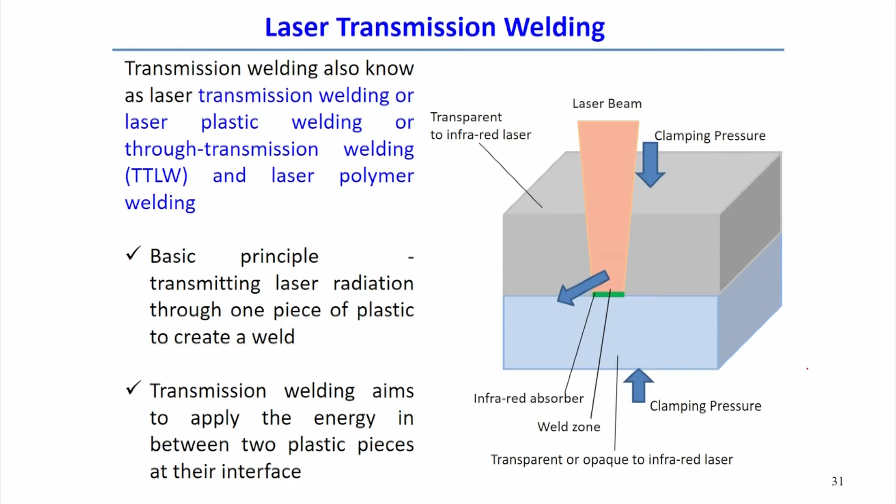Looking further, the process requirements for laser transmission welding: first is the transmitting upper part. The upper layer or component needs to be transparent to the laser wavelength.

The transparency of the laser light depends on the wavelength of the laser specifically used for the welding process. Normally, for example, 808 nanometer or 980 nanometer wavelengths are used, in the infrared or near infrared spectrum. In that range, the laser is specifically applicable for laser transmission welding.

Once we have the transmitting upper part, the next component is the absorbing lower layer. We choose the lower layer component such that it is able to absorb the laser light energy to generate heat at the interface.

Sometimes if both polymeric materials are transmissive in nature at the specific wavelength of the laser used, an absorbing additive such as carbon black doped at a rate of around 0.5% can be used at the interface layer. That carbon black absorbs the laser energy and creates some melt pool.

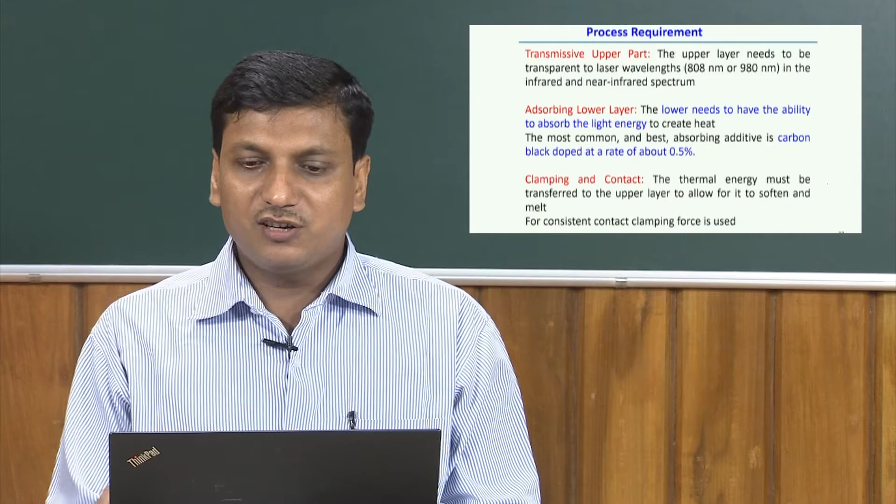Material compatibility: most plastics to be joined require similar chemical compatibility. The two components have to be chosen such that almost similar compatibility exists. At the same time, the melting and softening ranges for both plastics should be similar, or at least there should not be much difference in the melting point between the two components to be joined by laser transmission welding.

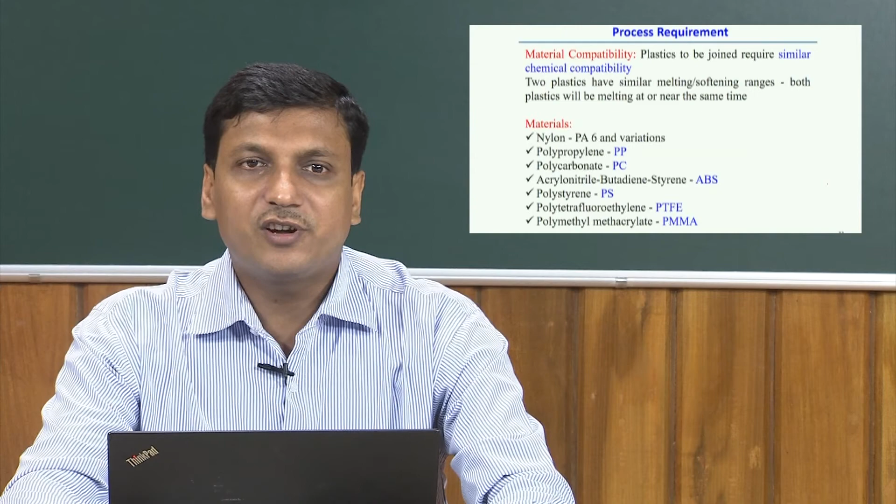Typical materials joined by this laser welding process include nylon (PA6) and its different variants, PP, PC, ABS, and polystyrene. These are short forms for different polymers that can be joined using laser transmission welding. PTFE and PMMA type materials can also be joined using laser transmission welding.

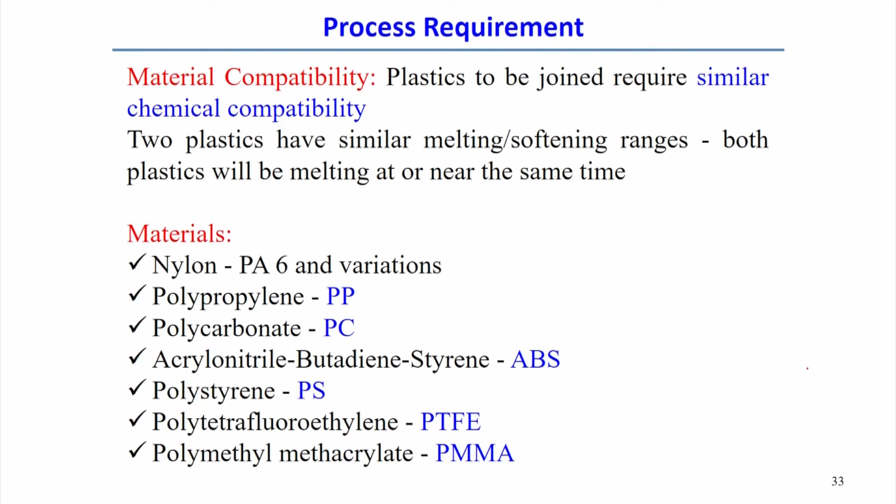Looking at the advantages with respect to other welding processes, there is minimal mechanical stress. The mechanical stress is very low because the difference in thermal expansion coefficients between the two materials is very small, so there is less chance of generating large amounts of mechanical stress.

Precise energy control: since we use laser as the source, we can very precisely focus on a specified spot, making it possible to control the amount of energy released at the interface. Very strong and durable welds can also be achieved by this process, and minimum flash and particulate development occurs, making it a very clean process.

The weld joint, or heat affected zone, can be confined to a very small area with this welding process. And finally, it is a very fast process, so very little welding time is required. These are the typical advantages of using laser transmission welding for polymeric materials.

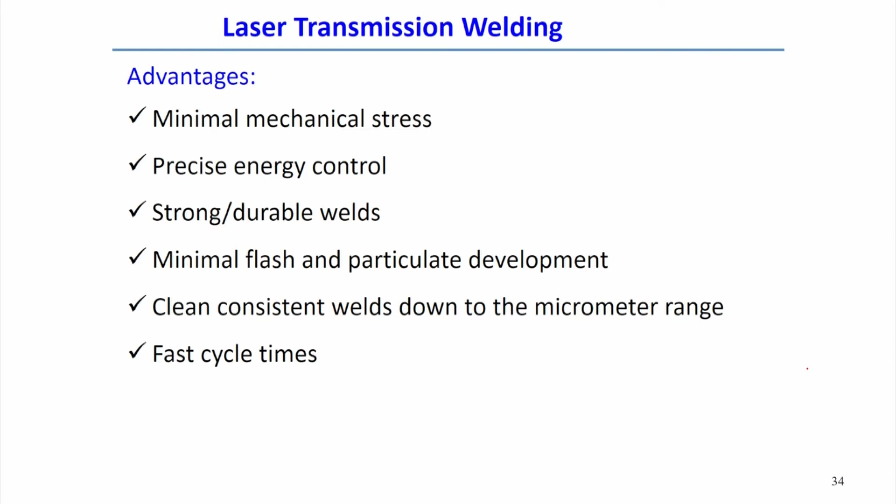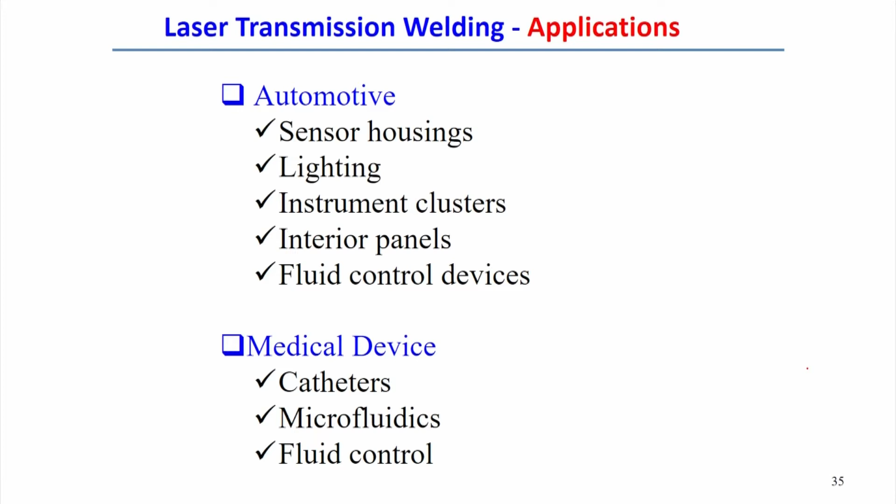Looking at other application areas of laser transmission welding: in automotive, sensor housing, lighting, instrument clusters, interior panels, and fluid control devices all use this process. In medical devices, there is huge application of laser transmission welding, specifically for joining polymeric materials, such as microfluidics and fluid control devices in medical instruments.

Overall, this process is mainly confined to joining polymeric materials, but other dissimilar combinations of materials can also be joined. We will discuss this later.

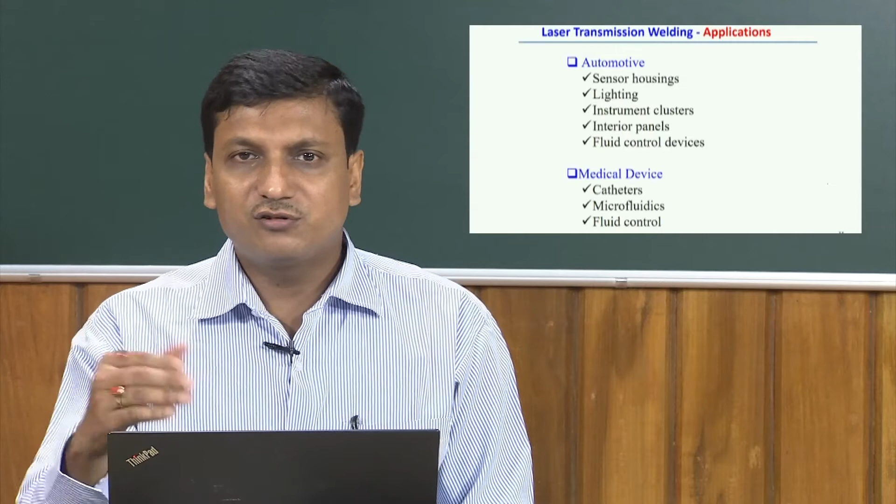Now, after laser transmission welding, we will look into glass welding. Glass is a very brittle material, so there are definitely issues in welding different kinds of glasses. Let us see what problems arise and what methodologies can be used for welding or joining glass.

Glass has a melting range called the glass transition temperature, a range of temperature over which heating of the solid material causes the glass to become softened and more flexible. After reaching this state, it is possible to join two glass components by simply applying small pressure at the contact point.

More precisely, when the glass crosses the glass transition temperature, it becomes a thick, viscous liquid, like slag. In this state it has very little surface tension, meaning the surface tension is reduced with the application of heat to the glass.

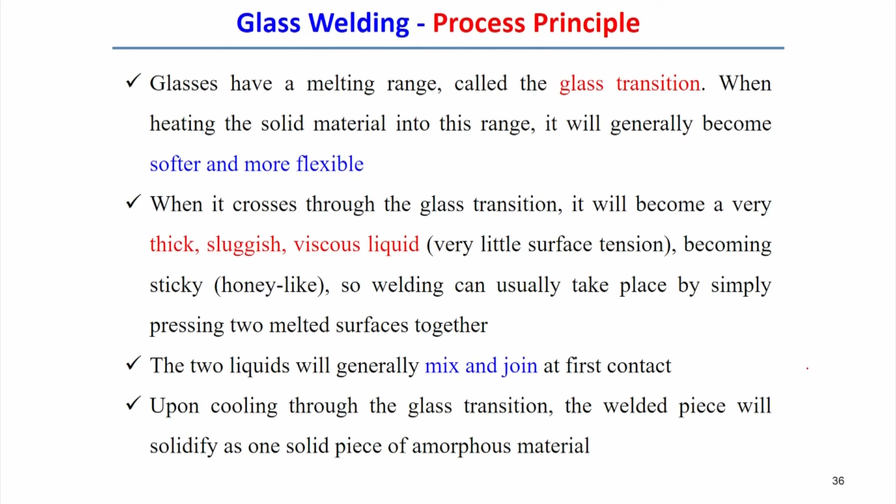Glass properties change through the glass transition temperature range, and after melting it takes the form of a viscous liquid. When they are in contact, the two components can readily join in the glass. After solidification, it again goes through the transition temperature, so properties can change as it's processed through this range, and one solid piece forms as an amorphous material.

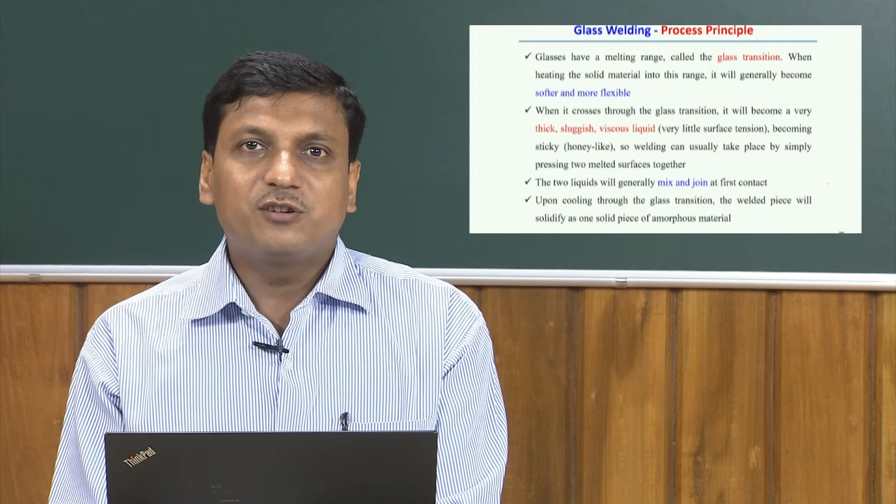We know that glass is a kind of amorphous material, not crystalline. Now, what methodology or type of heat source can be used for glass welding? Normally welding uses a gas or oxy-gas torch, or a furnace. These are typical heat sources for glass, and they can easily be applied locally to a certain part, causing melting and finally joining between the two components.

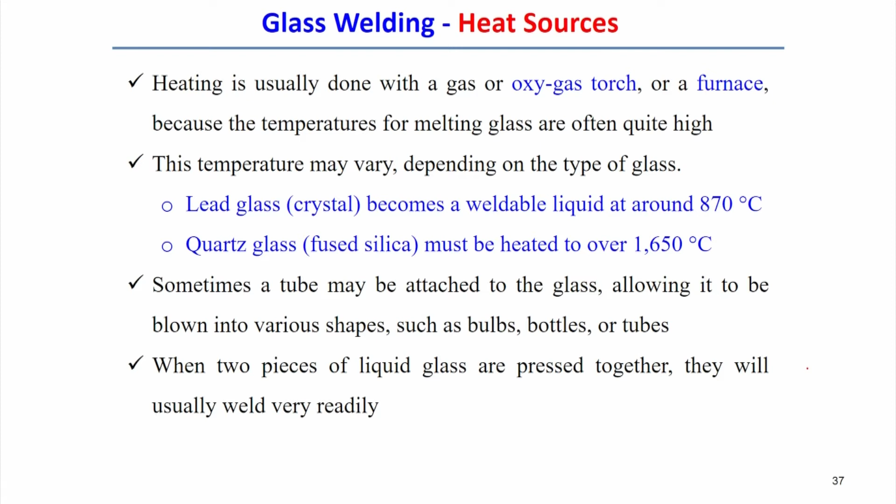But typically the melting temperature of glass is quite high, so the furnace is one choice for the heat source for welding glass materials. This melting range depends on the melting point of the weldable liquid, which differs for different types of glass. For example, lead glass, commonly known as crystal, becomes a weldable liquid around 870 degrees centigrade, but quartz glass, also known as fused silica, becomes weldable liquid around 1650 degrees centigrade.

So although both are glass materials, different types of glass may have a huge difference in melting point temperature, such that there is difficulty in joining two different grades of glass—this may be treated as joining two dissimilar materials, since there is a huge difference in the weldable liquid temperature between these two types of glass.

Sometimes tubes are attached to the glass, allowing it to be blown into various shapes. When the weldable liquid is formed in the glass, using a tube to blow it can create various shapes such as bulbs, bottles, and tubes. These are typical manufacturing technologies using glass.

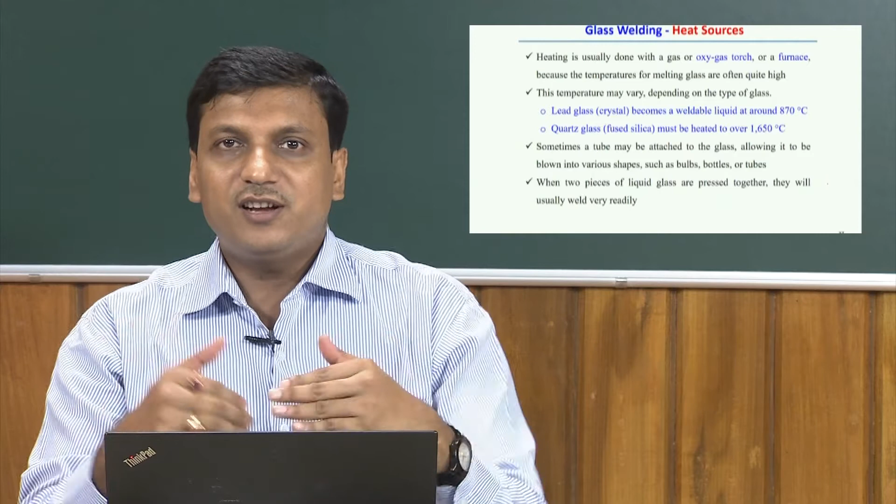But when two pieces of liquid glass are pressed together, they usually weld readily and join easily. However, although welding or joining technology for glass, or two different grades of glass, is well established, there are some limitations to the glass welding process. First, since glass is a very brittle material in its solid state, there is a high chance of cracking forming during the heating and cooling phases.

Because glass is very brittle, it is very difficult to absorb uneven thermal expansion during the heating or cooling phase. So there is a high chance of cracking forming during the processing of glass, specifically when you try to weld it.

For example, quartz has a very low thermal expansion coefficient, while soda lime glass has a very high thermal expansion coefficient. So joining these two types of glass is usually difficult. Therefore, it is very important to closely match their coefficients of thermal expansion to ensure cracking does not occur during the welding of glass components.

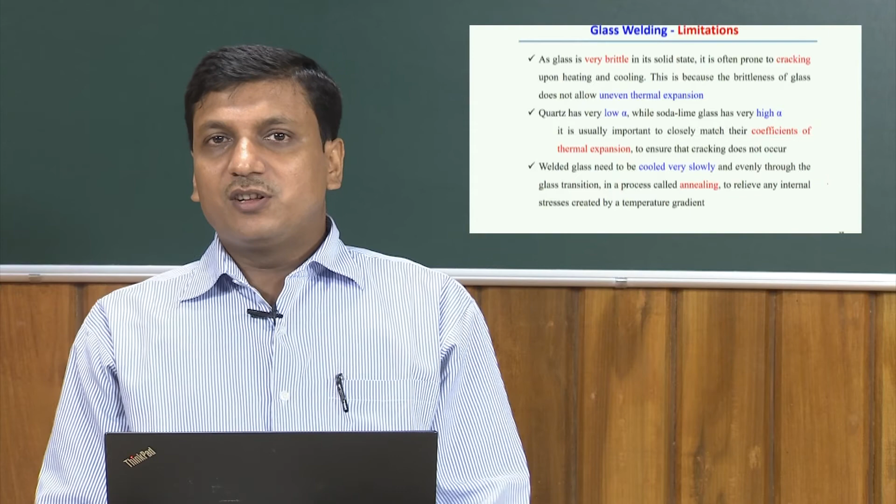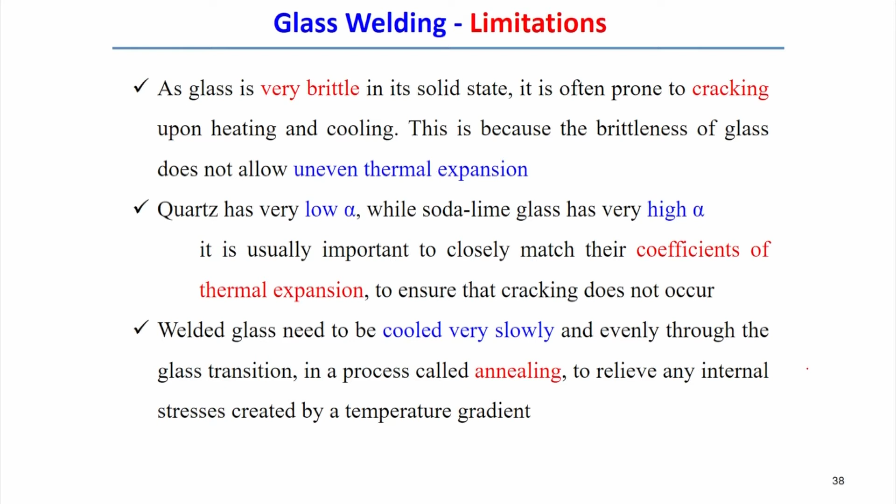This controlled cooling process is normally called annealing, which helps relieve internal stresses created by the temperature gradient. Therefore, the most significant limitation of glass welding is that very controlled cooling is required, and we must be very careful since glass is a brittle material that cannot even absorb a small amount of thermal expansion. That is the main limitation for welding glass components.

A typical application of glass welding is glass blowing. In this process, while the glass is in a liquid state, we use a tube to blow into it, which allows us to make different shapes such as circular, spherical, tubular, or cylindrical shapes. Different shapes can be formed, and this is generally followed during glass welding processing.

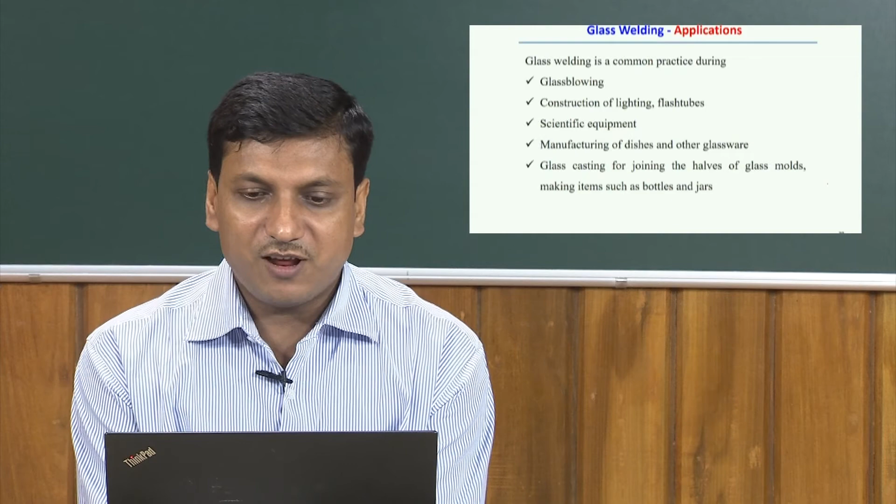Therefore, construction of lighting or flash tubes is another application of glass welding, along with scientific equipment and manufacturing of dishes and other glassware. Moreover, glass casting for joining the halves of glass molds, such as making bottles or jars, is also an application of glass welding.

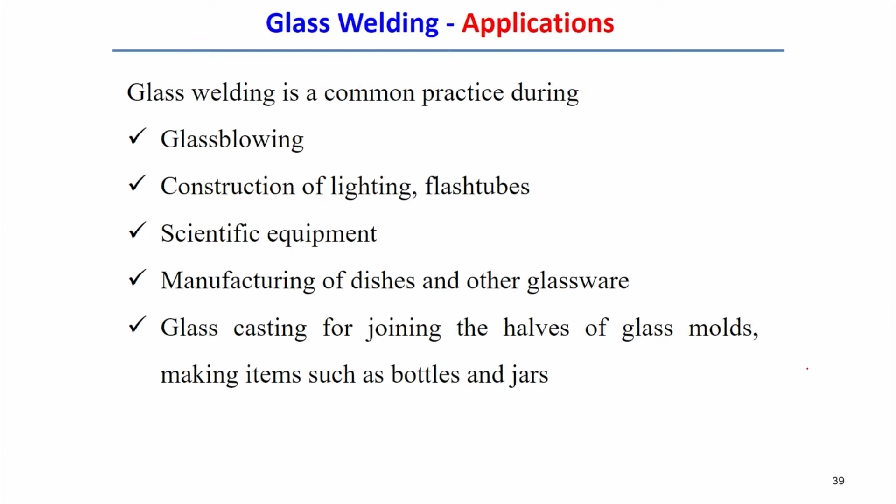Next, we will discuss the welding of ceramic materials. Ceramics are an important non-metal, and there have been several developments in different kinds of ceramic materials. Ceramics have high potential because of their increased toughness, high heat resistant capability, and non-catastrophic fracture behavior. These are the typical driving forces for the huge application of ceramic materials in several industries.

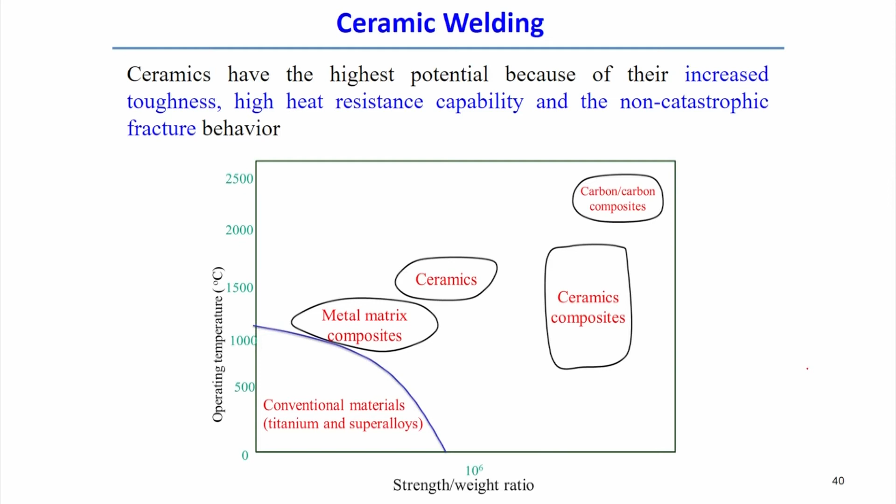Now, what are the typical joining or welding techniques for ceramic materials? Here you can see electron beam welding, laser beam welding, friction welding and diffusion welding - these are the main processing techniques for welding ceramics.

High beam energy application is basically restricted to small components of ceramics. For example, this can be used only for ceramics which have defined melting points, such as Al2O3. Therefore, for processing the welding or joining of Al2O3, we can use high beam energy, meaning electron beam energy or laser beam energy.

But in other cases, for example silicon carbide and silicon nitride, the use of high beam energy may not be suitable for this kind of material. High stresses caused by severe temperature gradients can easily damage the ceramic joint. Therefore, we should be very careful in the choice of material and the difference in their mechanical properties when joining ceramic components.

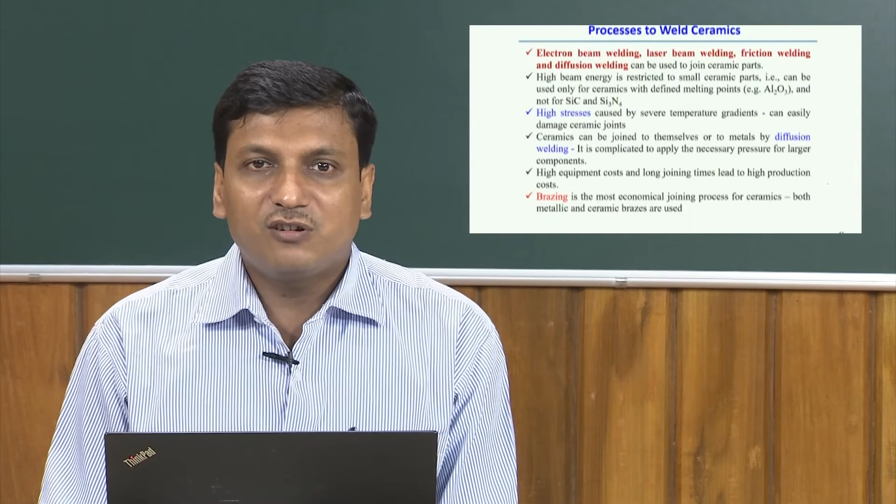Other significant joining methodologies for ceramic components include either similar joint configurations or dissimilar configurations with metallic materials by diffusion welding. In diffusion welding, the main difficulty is due to the necessary pressure that needs to be applied, specifically for larger components, and there is a time requirement. Normally the diffusion welding process takes a huge amount of time. High equipment costs and long processing or joining times basically lead to high production costs for ceramic components.

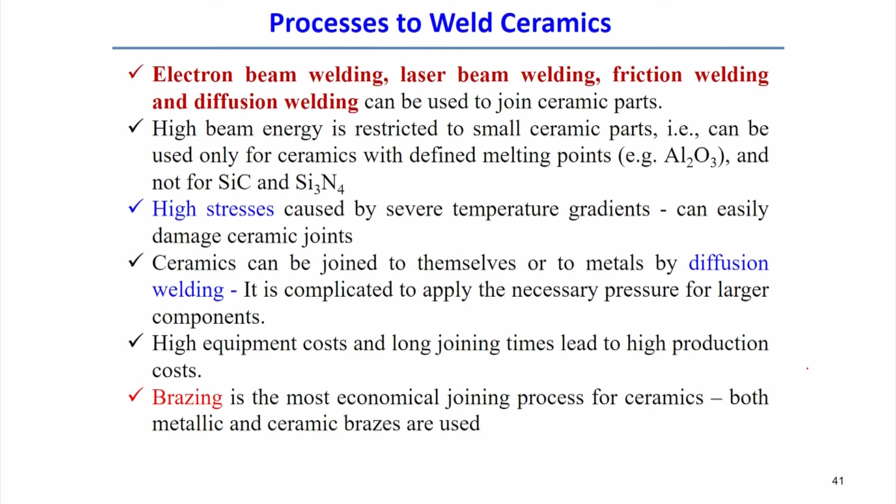Most economically for the welding of ceramic materials, people generally follow the brazing process, because brazing is the most economical joining process for ceramics. Both ceramic braze and metallic braze are used in this case.

If you look into the typical properties and applications of ceramics, they have very high temperature resistance, extremely high hardness, low electrical conductivity, high thermal insulating properties, high chemical resistance, and lower density compared to metal. These are the specific advantages of using ceramics.

Nowadays there is a huge application of ceramic materials, but the development or ease of weldability of ceramic materials is not up to the limit that we find in case of metallic materials.

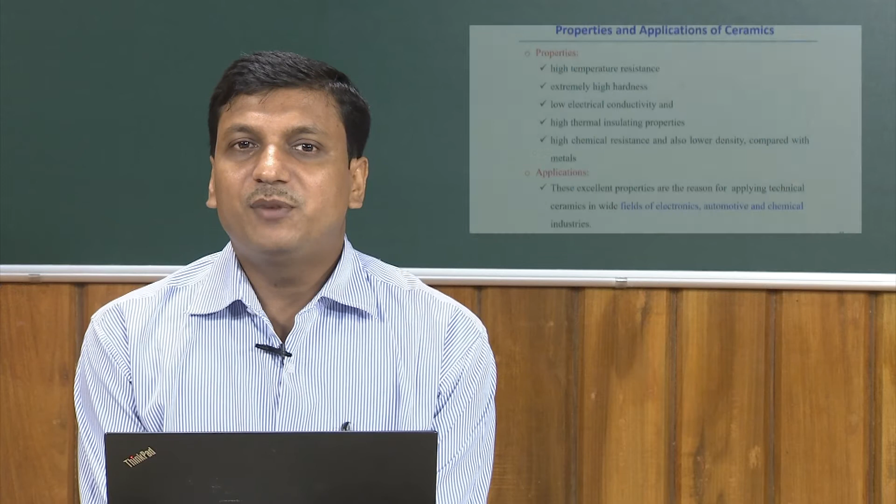Still, there is development in joining or welding of ceramic materials. As we discussed, we generally use high beam energy diffusion welding, and sometimes we use the brazing process for joining ceramic components, either ceramic to ceramic or ceramic to metals.

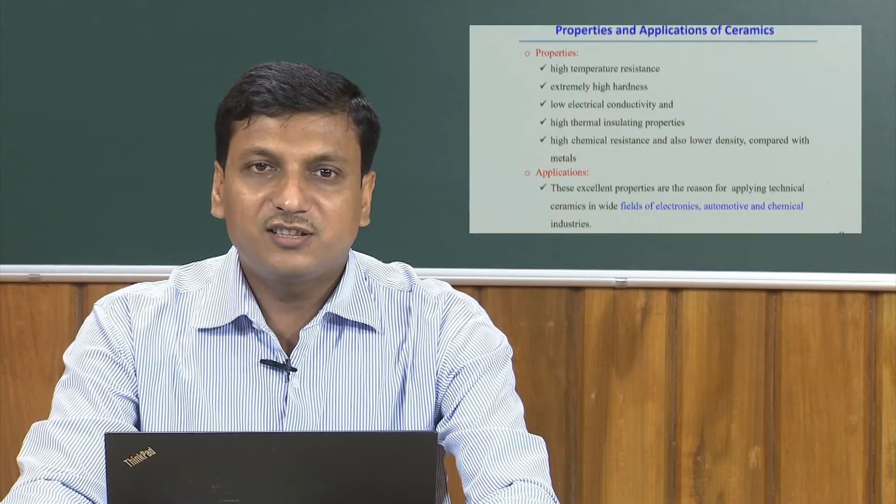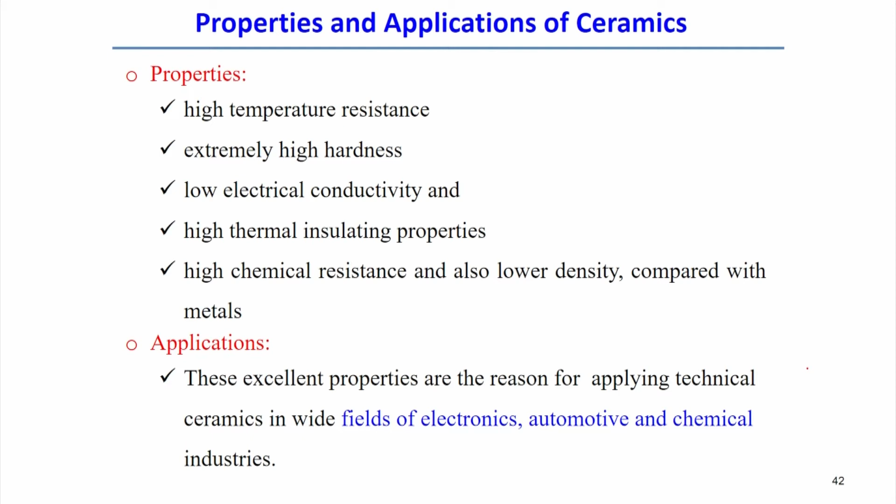There is a huge area of application for ceramics. Excellent properties are the main reason for applying technical ceramics in a wide range of fields: electronics, automotive, and chemical industries. These are the areas of typical application of ceramic materials.

In aerospace technology, some metal components can be replaced by ceramic components, because the aerospace industry goes through a very high temperature range, and high density metals may create problems. In that sense, ceramic is most alternatively used in that place, because ceramics have very good high heat resistance properties.

Ceramic welding is also applied during furnace operation, simply by conveying a dry mixture of refractory aggregate and oxidizable particles, kept together through specifically designed water-cooled lances.

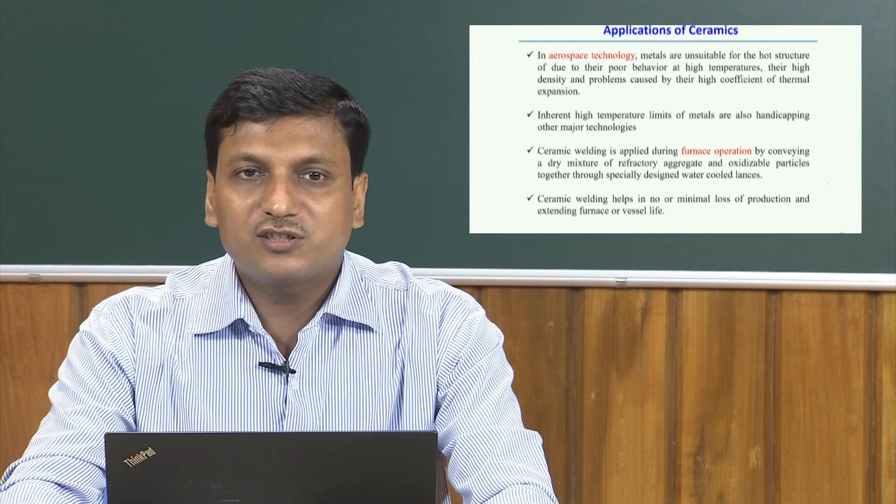In that channel we can put this ceramic refractory material, and then ceramic welding helps with minimal loss of production, while at the same time extending the furnace or vessel life.

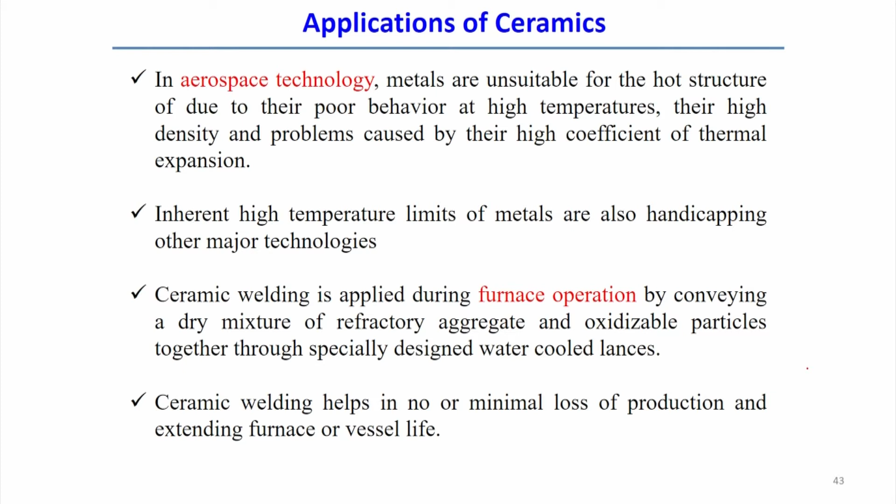During furnace operation, ceramic welding is an efficient way without loss of production, and at the same time it imparts to the life of the furnace or vessel.

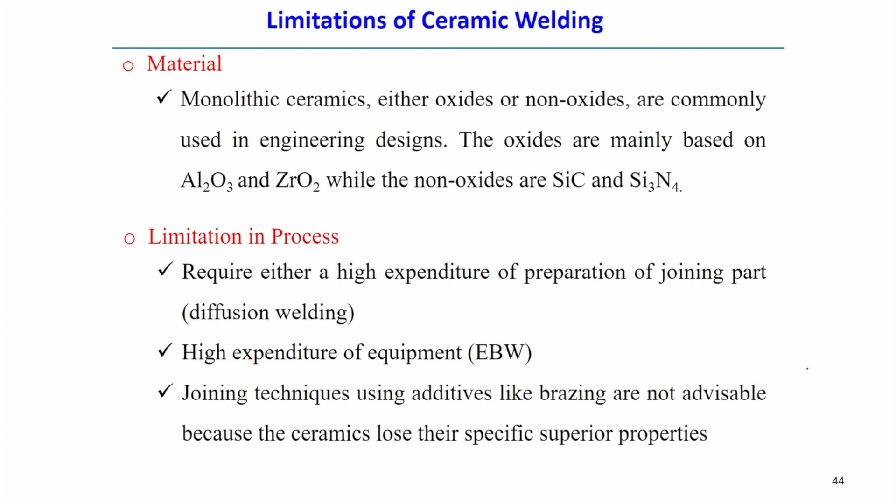Joining techniques like brazing are the most economical way for ceramic welding, but brazing is limited because the ceramics lose their specific superior properties. When you use brazing, the welded part between the two ceramic components becomes weaker compared to the base material.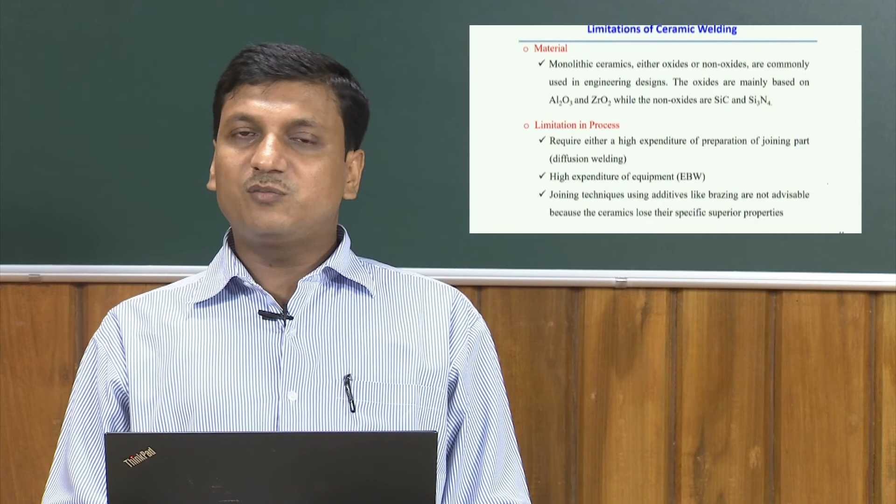Therefore, for very precise applications brazing may not be usable, but on the other hand, brazing remains the most economical way to join ceramic components.

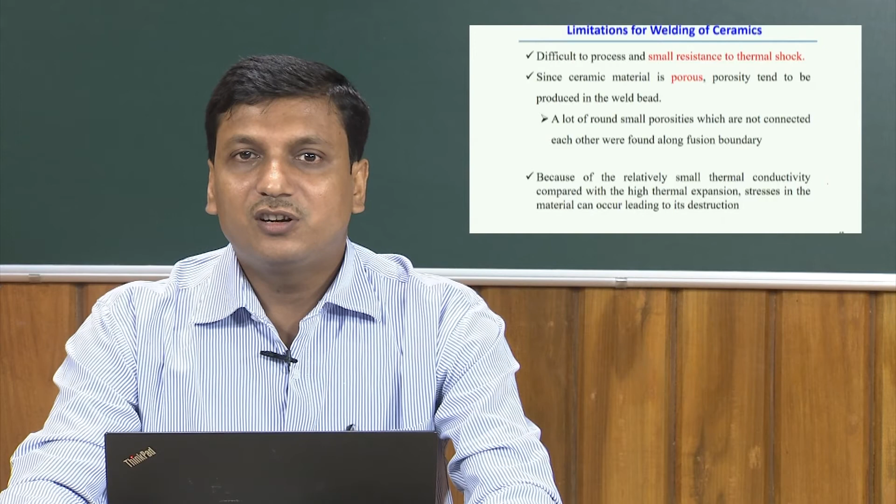Other limitations include difficulty to process and small resistance to thermal shock. It is very difficult to process ceramic materials because in most cases ceramic is also brittle in nature, with small resistance to thermal shock load, making it difficult to process.

Since ceramic material is porous, porosity sometimes creates problems during welding, and we can find marks of porosity, or find only porosities at the weld joint during fusion welding of ceramics.

Since ceramics have low thermal conductivity compared to other materials, high thermal expansion stresses can occur in the material, which can lead to its destruction.

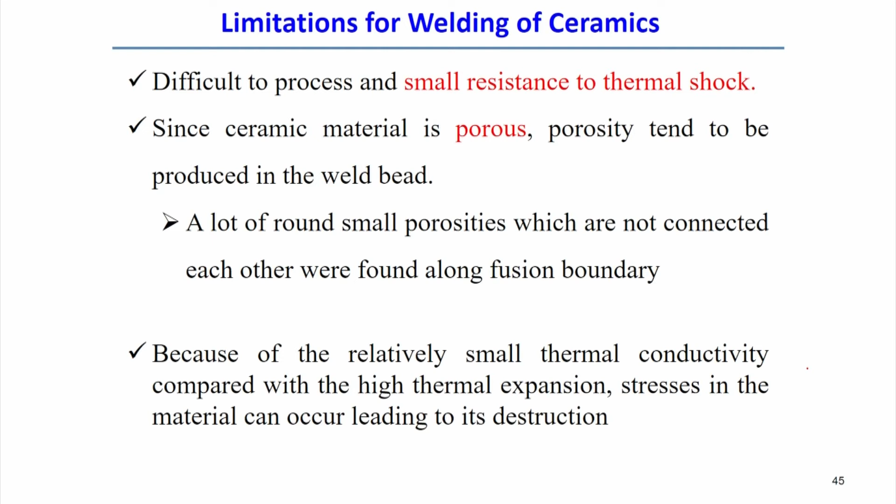So, low thermal conductivity combined with high thermal expansion can cause failure of the weld joint during the processing of ceramics. That is one obstacle or difficulty in processing ceramics.

Nowadays there is a huge application of plastic components, specifically biocompatible plastic components, in combination with metallic materials. We find this requirement specifically in the medical instrument or medical industry. Therefore, joining these two components, plastic to metal, has some significance.

But if we look into why there is a need for joining plastic to metal, although this is a dissimilar combination, there are several points: energy consumption, environmental concerns, high performance, and cost saving.

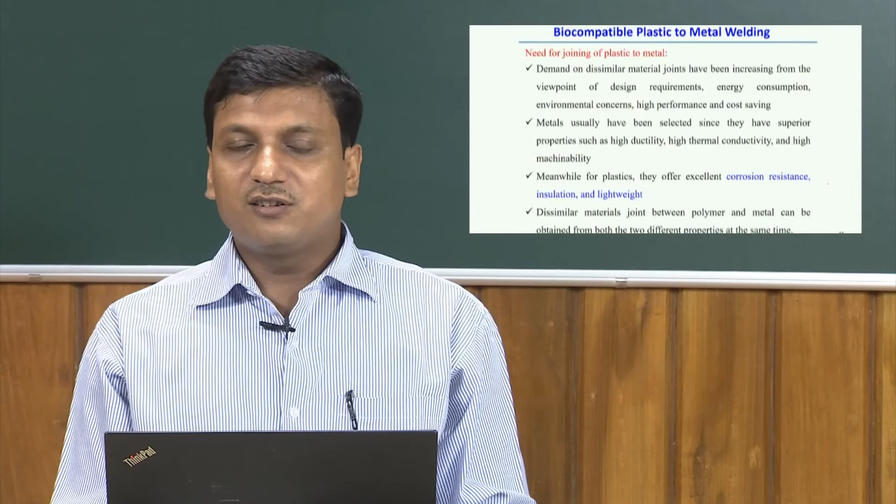Mainly metals have been selected since they have some specific superior properties, for example high thermal conductivity and high machinability. So metal has some advantage based on its properties, but plastic also has excellent properties like corrosion resistance, insulation, and lightweight, which are comparable to metallic materials. So metal has certain advantages, and plastic has certain properties too. Combining these two brings a huge difference in properties.

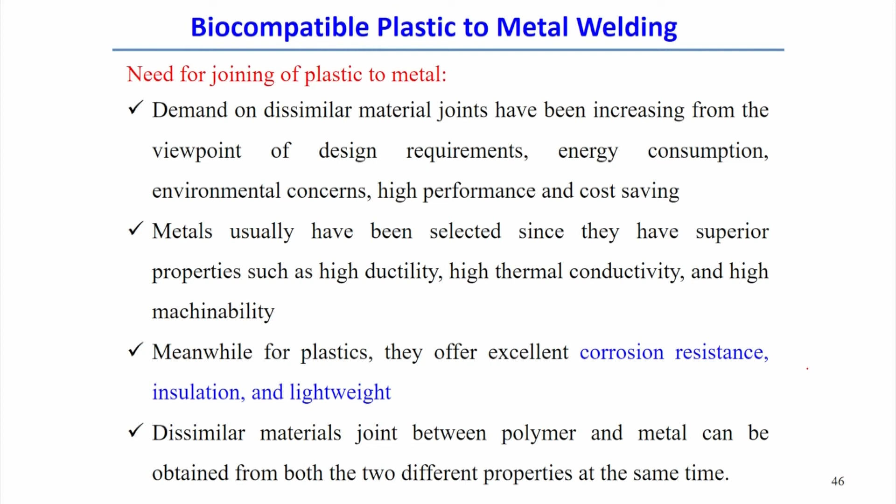Therefore, joining or welding metals to plastic has huge difficulties, because their properties are completely different—not only mechanical properties, but thermal and chemical behavior are also different. We can take an example.

If we see two materials, PET and stainless steel, and we want to join these—one plastic and one metal, stainless steel—we see there is a huge difference in melting point temperature: one is 243 to 260 degree centigrade, the other is around 1400 degree centigrade.

Thermal conductivity also has a huge difference, one is 0.24, the other is 138. For the coefficient of thermal expansion, one is 6 into 10 to the power minus 5, the other is 1.72.

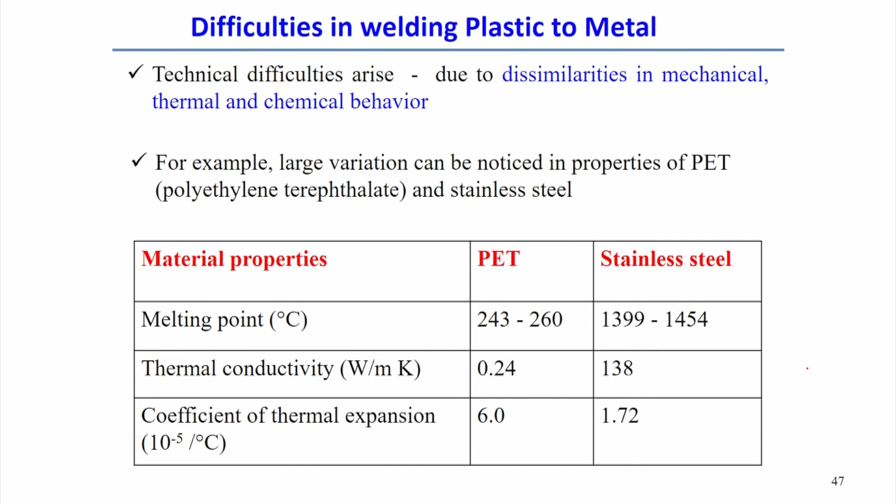So there is a huge difference in these mechanical properties, making it very difficult to join these two materials. But several methodologies have been developed for joining plastic to metal. One is polymer-metal hybrid joints formed using various joining techniques, such as adhesive bonds or glue, or mechanical tools—the most convenient way to join these two components.

Using adhesive bonding for joining aluminum and PTFE, we successfully achieved good results, but only after very good surface treatment with sodium. So surface preparation is an extra requirement in this case.

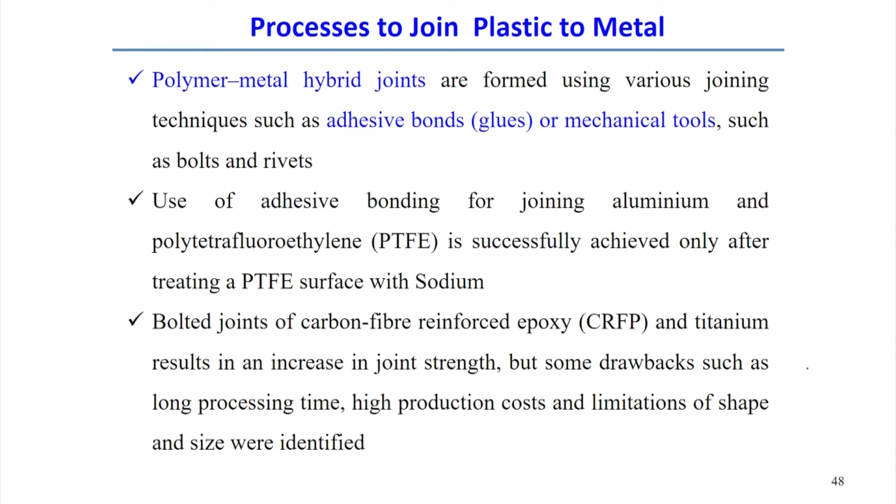Otherwise, bolted joints using mechanical instruments—simply bolted joints of carbon fiber reinforced epoxy (CFRP) and titanium—also result in increased joint strength, but they have drawbacks such as low processing rate, high production cost, and limitation of shape and size. That is the main obstacle in using mechanical joining of these two components.

The difficulty with adhesive bonds is that although we can use glue more easily for joining these two components, there are environmental restrictions on the emission of volatile organic compounds, and difficulties with mass production using adhesives or glues. Also, there is a limited lifespan for this glue, so in that sense it is limited.

Other ways to improve quality, production time, rate of production, and reliability of this dissimilar material combination include laser beam welding and resistance welding. These are the two main welding processes used for joining plastic to metal.

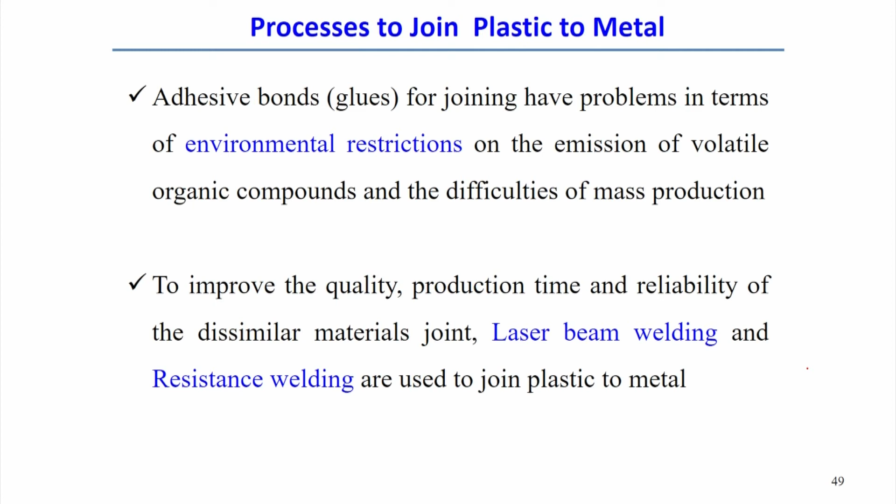If we look into the joining of TPC, that is the polymeric material and joining process such as mechanical fastening and adhesive, we can use it. But the point is if we use mechanical fastening, we can find stress concentration due to hole drilling, and there is extensive surface preparation also required, so that is actually incompatible for mass production requirements.

Alternatively, to avoid this situation, resistance welding can be used for joining metal to plastic. When applied to TPC, it produces a joint close to parent strength, because using the resistance welding process in short processing time, the joining strength is very close to the parent metal, or among the metal and polymer, whichever has lower strength. If you compare, an almost similar range of weld joint strength can be achieved by joining.

At the same time, additional advantages like reprocessability, recycling, online monitoring, automation and cost efficiency make resistance welding of metal to plastic combinations the better choice compared to using adhesives or mechanical joining.

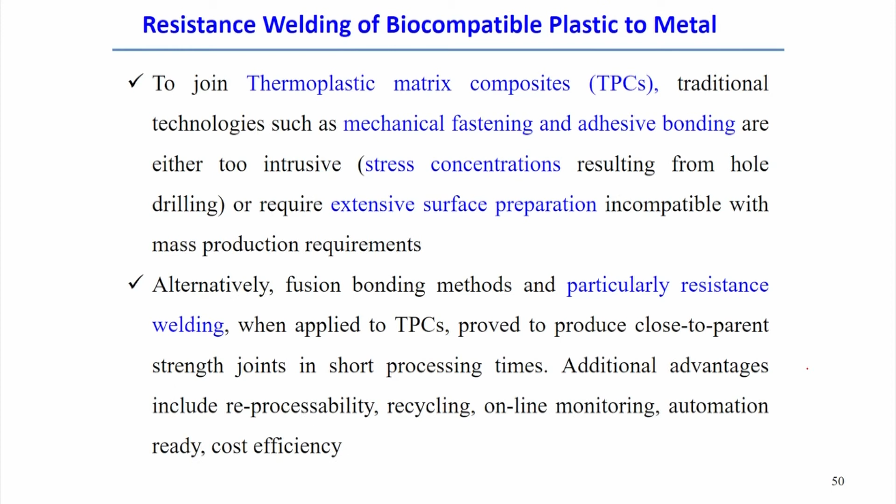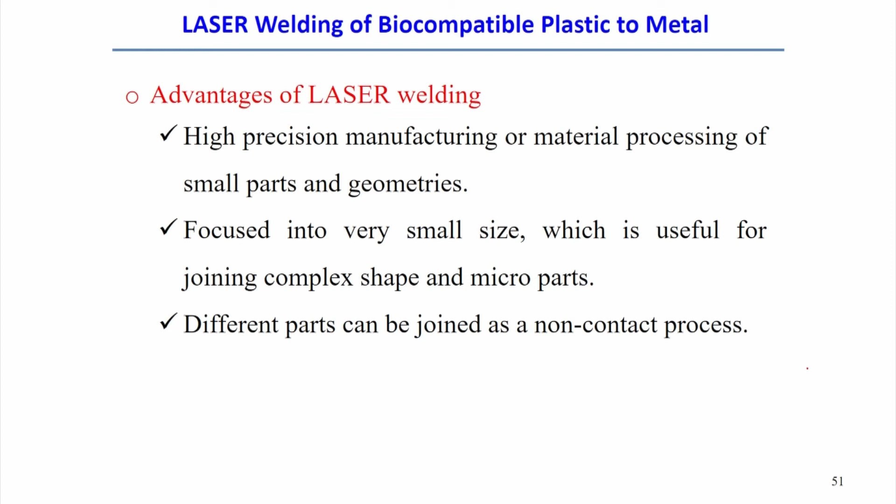Laser welding advantages are known to us also, because laser welding is a high precision manufacturing process for material processing of small parts and geometries. The laser can be focused into very small size, which can be used for joining different components, even micro components can be joined using laser. Another advantage is that laser is a non-contact process, which is an added advantage specifically for welding of different materials. So apart from resistance welding, laser transmission welding is another option for joining metal to plastic.

As already discussed about laser transmission welding or laser transmission joining, in this case the polymeric material is normally kept as a transparent material on the upper side, and the metallic material on the lower side. At the interface, heat is released on the metallic material, and we can join by laser transmission welding. This is specifically easy to do in joining between metal and plastic.

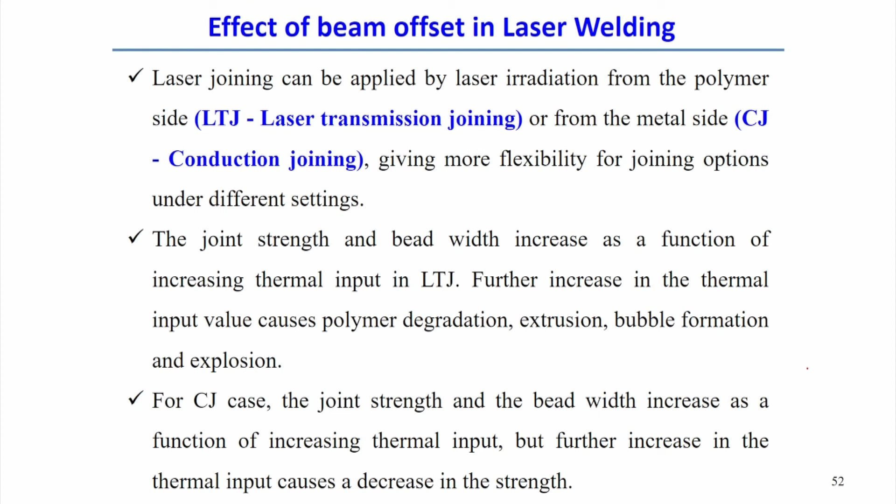It is observed that joint strength and bead width increase as a function of increasing thermal input in laser transmission joining. So if you increase the thermal input, strength can be increased, but if we increase too much, there may be degradation of the polymer and bubble formation, explosion, which can also happen. So we need an optimum amount of energy such that joint strength can be optimum between the polymer and the metal. But on one side it is called laser transmission welding, on the other side it is called conduction welding.

In conduction welding, the joint strength and bead width also increase as a function of increasing thermal input, but further increase in thermal input causes a decrease in strength. So some optimum amount of thermal input is required to get a good joint between the metal and the plastic.

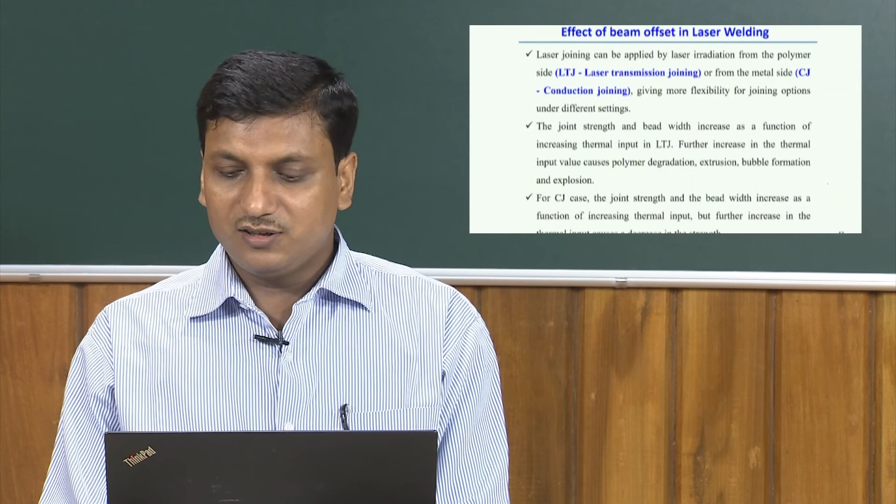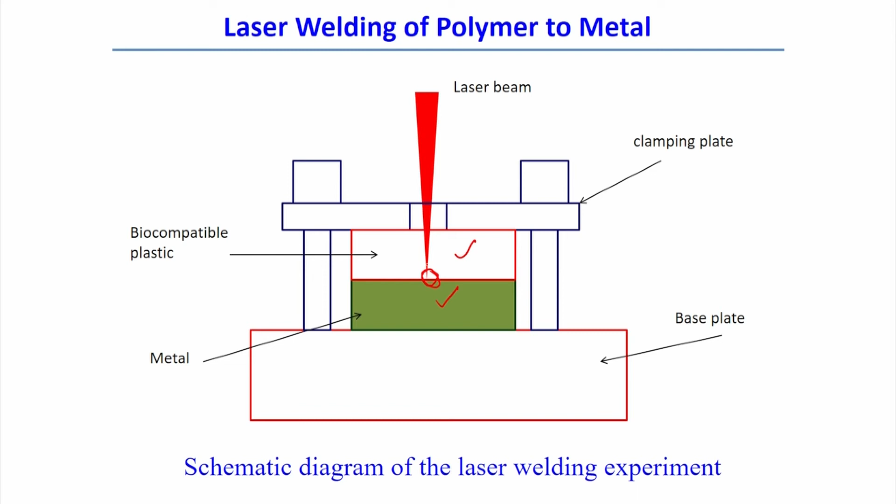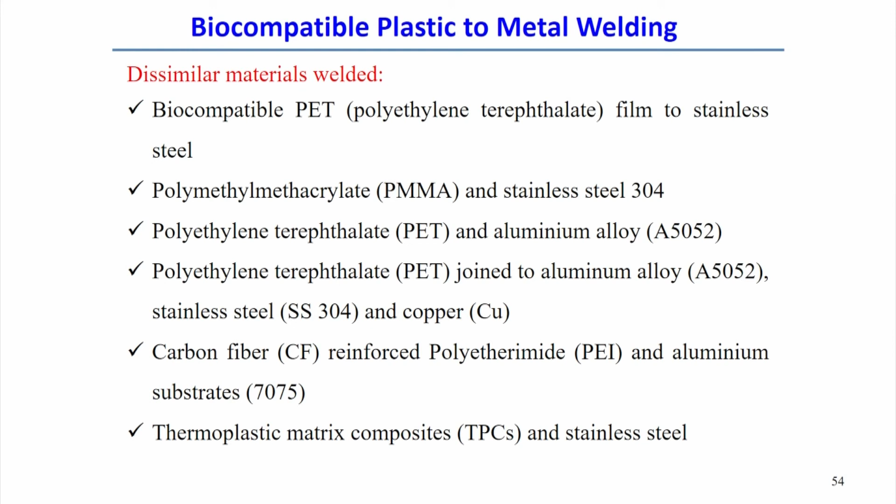Thermoplastic matrix composites (TPC) and stainless steel can also be joined using this process. So we can find several combinations of polymeric and metallic materials joined by laser transmission welding. Typical applications of this biocompatible plastic-to-metal joining are found in the electronics industry, aerospace industry, medical, automotive industry, and other industries requiring hybrid material components.

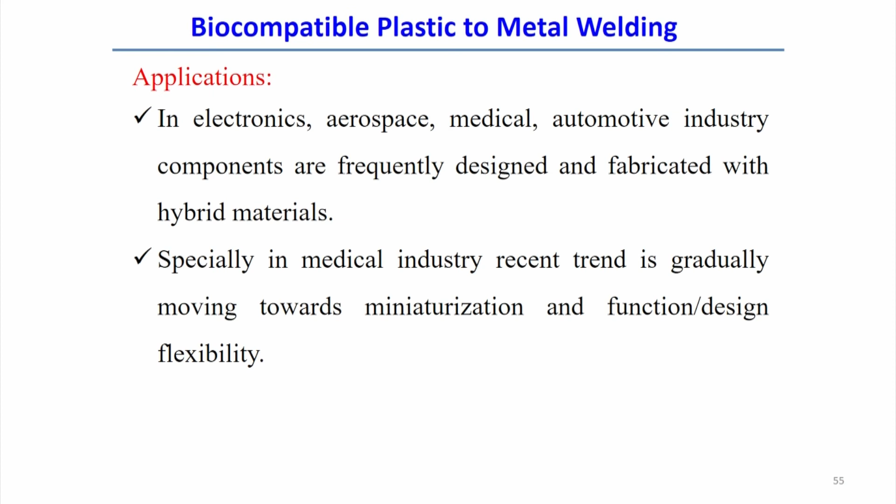This process is mostly suitable, but most specifically laser transmission welding is found in the medical industry as a recent trend, gradually growing because of the miniaturization of components in the medical industry, leading to increased use of this welding technique.

Now, having covered all these different types, though we've covered only a few specific welding or joining techniques for non-metals, let's summarize the different joining techniques and issues in welding of non-metals. First, we discussed welding of thermoplastics, mainly developed through hot gas welding, hot plate welding, ultrasonic welding, spin welding, vibration welding, friction stir welding, and radio frequency welding.

These are the typical methodologies followed for welding thermoplastic materials. But among these techniques, ultrasonic welding of plastics is more precisely controlled in a very small zone, generally requires a very thin plate, and has a very short weld cycle time.

After discussing ultrasonic welding, we covered ultra short pulse laser welding, which is very suitable for highly transparent materials, because for transparent materials we can't use any conventional laser welding process. In this case, if we use the ultra short pulse laser as it processes through the transparent material, there may be the possibility of absorption of laser energy at this point, and this specifically happens in case of the ultra short pulse laser.

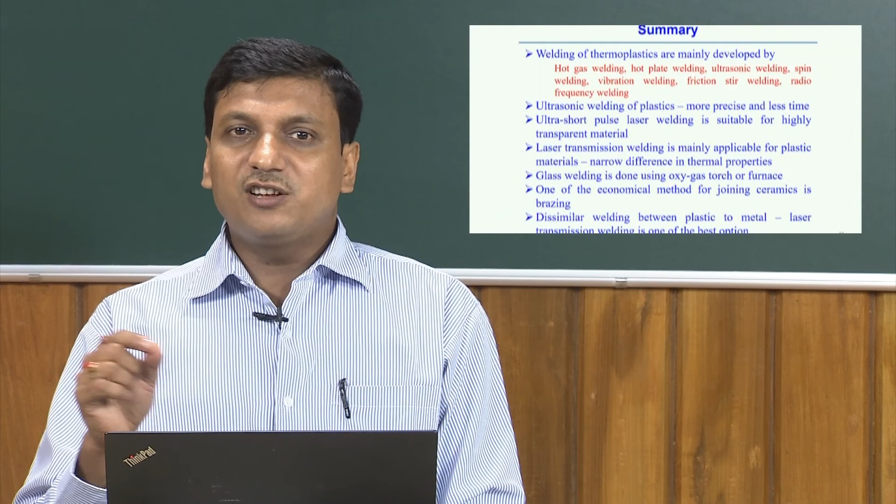Then there's glass welding, although very limited welding processes exist for glass. Mainly we use an oxy gas torch or furnace to bring the glass to a flexible or viscous state, such that when the components are brought into contact, a readily formed joint can occur, especially in case of glass. But overall, we find that welding of glass has very limited techniques.

One of the most economical methods for joining ceramic is brazing. This technique is economical, but it also has some other limitations.

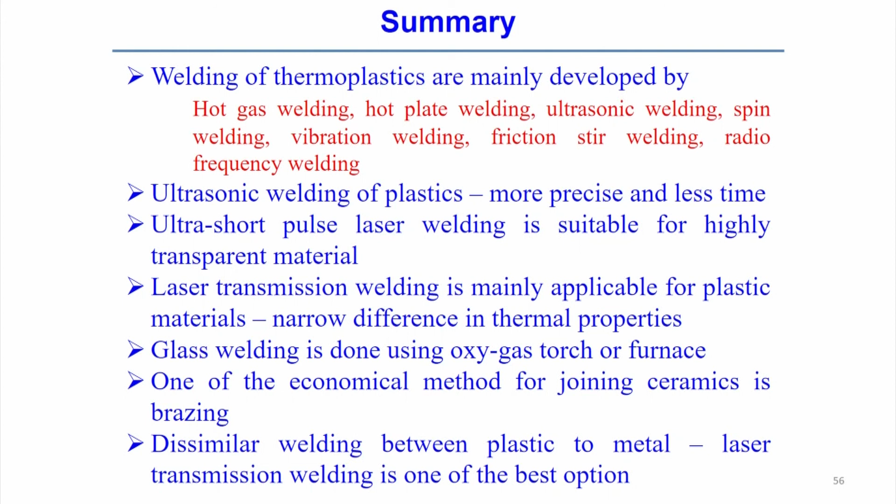For dissimilar welding between plastic and metal, normally we find that laser transmission welding is one of the good options for joining between dissimilar plastic to metal.

So in this module, we have discussed different welding techniques, several issues, advantages, disadvantages, and different application areas for welding and joining of non-metals. However, there is a need for extensive review of works, and there are so many other techniques that can exist specifically for joining non-metals, but we have covered only a few selective techniques in this case. Thank you very much for your kind attention.